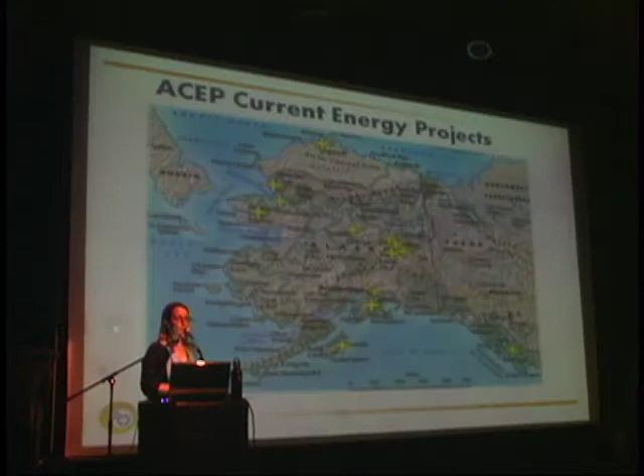So without further ado, I'm going to bring up Casey Pape, who's going to be our speaker. And Casey works with a group out of the Institute of Northern Engineering who's been doing studies on cold-loving bacteria, or psychrophiles. And I'm not going to go into that at all because he is the expert on that. But they've been doing some really exciting work with those bacteria and biodigesters that could really make a difference for that technology here in Alaska.

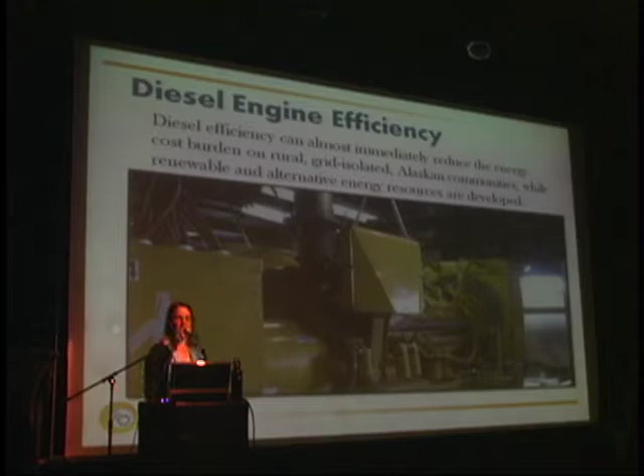So we look forward, Casey, to your presentation. Why don't you come on up? He just got back from Cordova where he's been doing a project there with the students. So he'll be talking about that as well. Casey, it's yours.

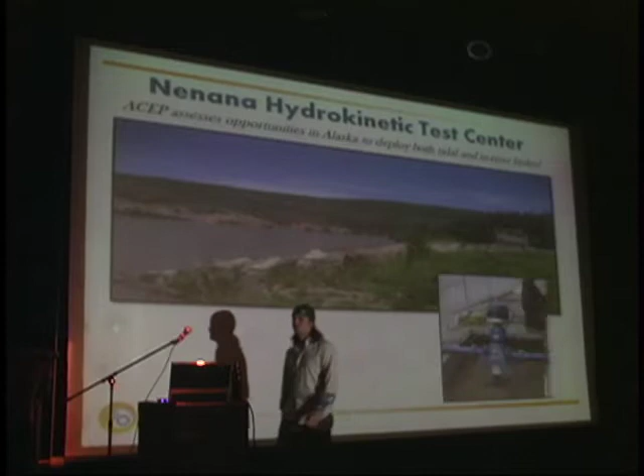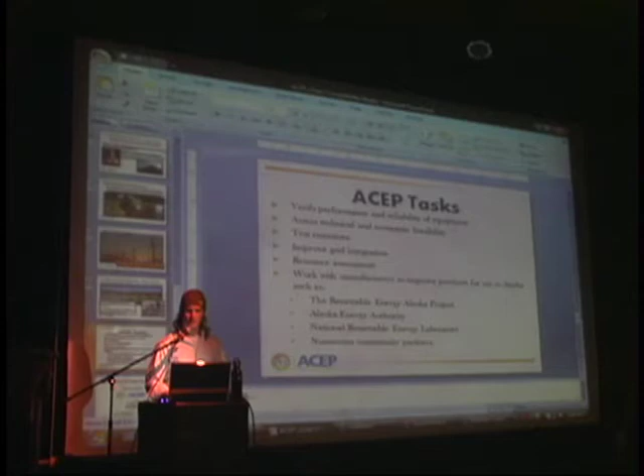Thank you again, Julie, for that nice, warm introduction, and thank you, everyone, for coming to our talk today. Let's see here. I'm going to put down ACEP's presentation and pull up mine.

So today, I am going to be talking about our Cordova Biogas project, which is located in Cordova, Alaska. And just a show of hands, is everyone here familiar with biogas technology or anaerobic digesters at all, or kind of have an awareness of what my talk is likely to be about today? Okay, so basically, this project was funded by the Denali Emerging Energy Technology Grant, and this project was titled the Cordova Biogas Project. And my lecture today will be Energy from Psychrophilic Bacteria, a cold region alternative for biogas.

Basically, my talk will go into discussing what our research group is trying to do, and that is anaerobic digestion technology is ubiquitous throughout the world. Anaerobic bacteria, which consume organic material as a form of respiration in the presence of a non-oxygenated environment, exist in all regions of the planet, but they're most successful in warmer regions. Their biologic rate is highly dependent upon temperature.

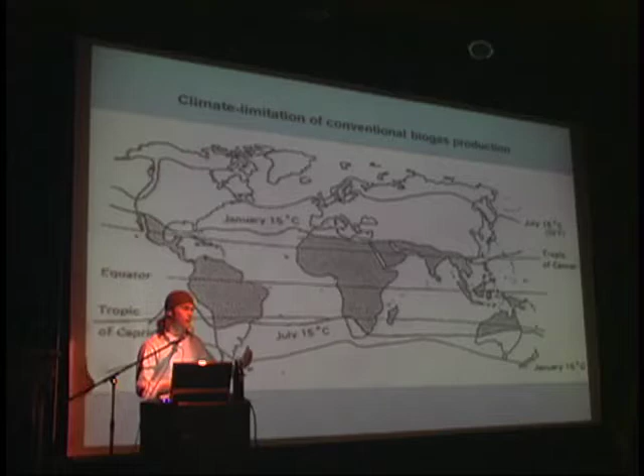So what our research group was trying to do was extend that technology further north in latitude, or southern in latitude. So that's what we're going to be discussing today. These digesters are very popular in equatorial regions of the world, but they're not very popular as you go further north and the temperature becomes a limiting factor.

So my talk summary will go into the motivating research and the goals of this project and some of the ideology behind it, as well as an introduction to small-scale anaerobic digestion technology. And then we'll go into the Cordova Biogas Project and discuss what we learned, some of the triumphs and the pitfalls of that experiment, and then we'll discuss limitations of the technology and some of the future prospects for the technology in Alaska.

I would imagine my lecture will go for about 30 to 45 minutes, and then just open it up for a Q&A discussion. And really welcome all feedback, all back and forth. Would be really great to hear what you guys all have to say, and any questions that you have about the technology, I'm more than willing to entertain, as well as my research in limnology and thermokarst lakes for some of you that were expecting a talk that was more along those lines.

So the project goals and the summary of the project was to improve conventional anaerobic digestion efficiency through the use of psychrophilic, cold-adapted bacteria found in Arctic lake sediments in Alaska to provide cooking and heating fuel for Alaskan households, again, at the small scale.

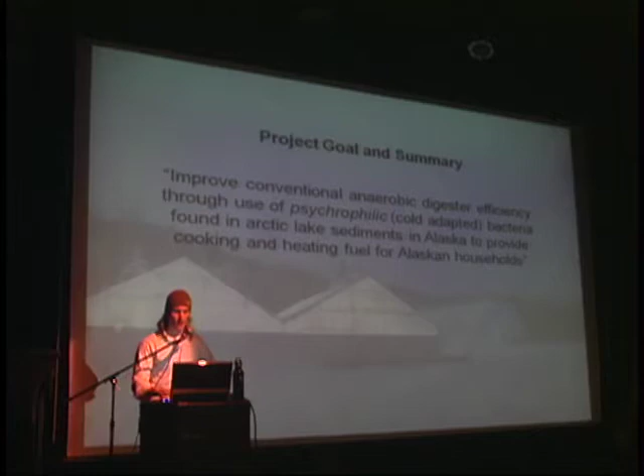So really we're entering into an age where we can no longer look at materials and products in this kind of linear fashion of a product is made and then thrown away and that's it. We now need to start looking at these things as, even though they have no more use to us, they're still a resource, and we can extract the energy that's still retained in them, or resources that are still available to us.

And so organic food waste, human waste, animal waste, these are all resources that we're now starting to reevaluate and realize that, you know, we have to recycle them or dispose of them at great cost to us, but there's actually a resource potential there. So the goal of this research is to try and utilize that for something that we all care about.

And in Alaska, an obvious one that comes to mind is energy, because we all know the high costs of energy, electricity, gas, heat, everything is more costly up here due to the nature of how spread out everything is and how much it takes to transport.

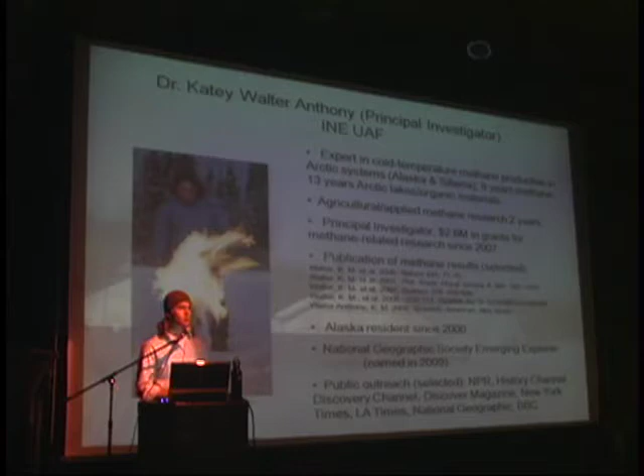And basically, they became emerging explorers in 2009, and during a meeting, they got to discussing their disciplines. And Katey, my professor, who primarily studies permafrost and thermokarst topographies, focuses her efforts on studying methane emissions from Arctic lake sediments around the Arctic in both Alaska and Siberia primarily.

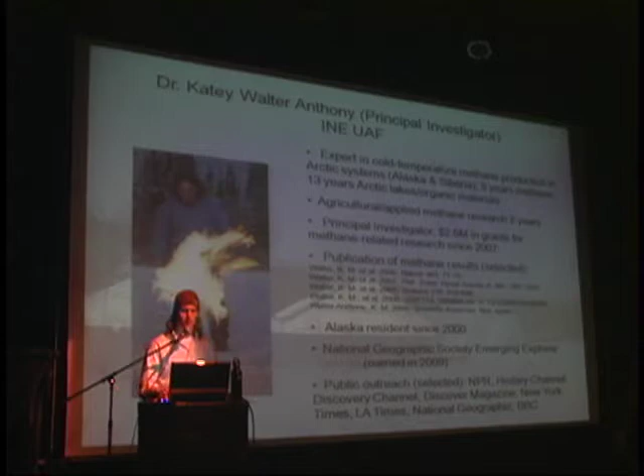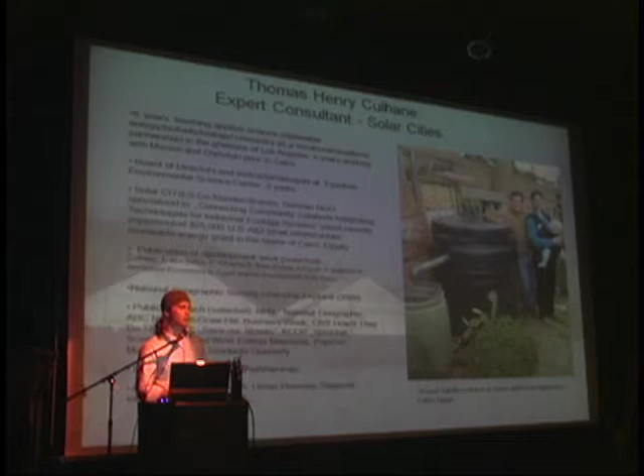And T.H. Culhane develops small-scale anaerobic digesters in places like Egypt, Pakistan, Nepal, places like that, where the cost of energy is very high and often poor education, poor infrastructure. Biogas technology is coming on very strongly in these regions because it offers great personal benefit and quality of life for very minimal cost.

So here's our target molecule. Our target molecule is methane. For those of you who don't know what biogas is, it's a mixture of multiple gases, methane being the primary one, the target one, the one that we're interested in, as well as carbon dioxide and trace other gases, water vapor, hydrogen sulfide gas, and a slew of others, or volatile fatty acids, things like that, but in trace amounts. For the most part, it's methane and carbon dioxide.

And this can be burned directly when gathered into a high enough energy density or high enough density, it will ignite. And it can be used for cooking stoves, heaters, lights, anything that methane can be used for, anything that natural gas can be used for, biogas can pretty much be used for as well.

So technology overview: anaerobic digestion, which is the overall process for making biogas, is a multi-step process in which bacteria obtain their energy by consuming organic matter without the presence of oxygen. So whereas you and I breathe air through an aerobic pathway, we release CO2 and water vapor in order to consume sugars and our carbon to make ATP. These bacteria do it in a non-oxygenated environment.

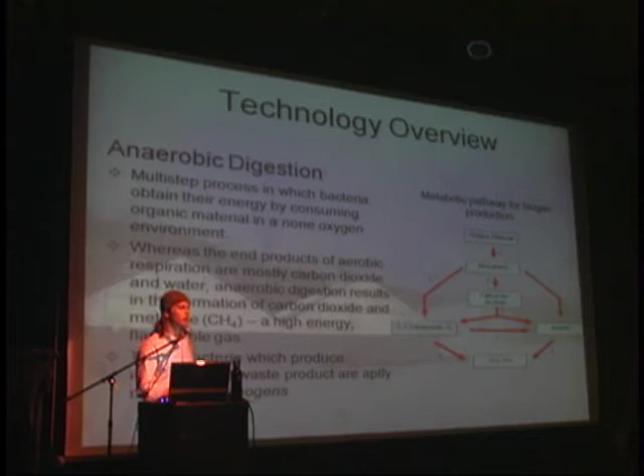And that requires more than just a single microorganism. It requires a slew of bacteria ultimately. And so the pathway is 3, arguably 4 steps. So you have a hydrolysis phase where complex organic matter is broken down into simple sugars, and then from there is fermented, in which acetogenesis occurs, making acetic acid, and then from there it's ultimately consumed by methanogenic bacteria, which release methane as a byproduct of their respiration.

So these are methanogens, and methanogens are defined by the temperature range they occupy. So there's three main classes of methanogens: thermophilic, mesophilic, and psychrophilic. And what this project focuses on is the psychrophilic. Thermophilic and psychrophilic are both labeled extremophiles in that they live in environments typically assumed to be non-ideal for life, extreme climates. And that's all I'm going to say about that.

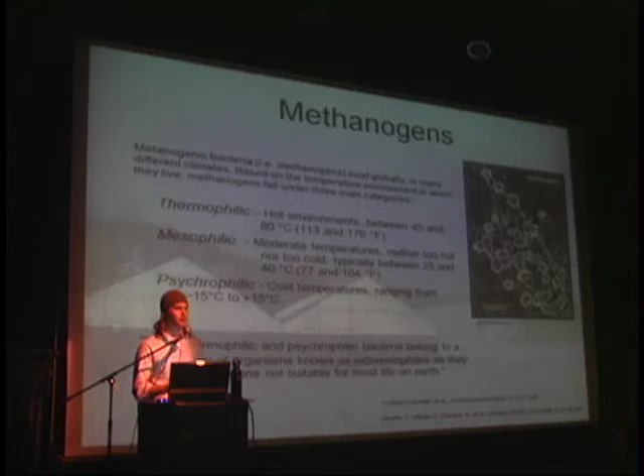I've got a little picture here of methanogens, a type of methanogenic bacteria. This is a colony type bacteria, but I want you to know that they exist in all different forms, single-celled organisms, flagellated, mycelium, all sorts of stuff. So they don't all look just like that.

So basically, what we're trying to mimic in this experiment is like a cow's stomach or your digestive tract, a non-oxygenated environment where bacteria can break down organic material and be cultivated in a typically warm place in order to utilize organic material and release methane. Since our goal is the methane, we want to try and optimize the conditions in which those bacteria live.

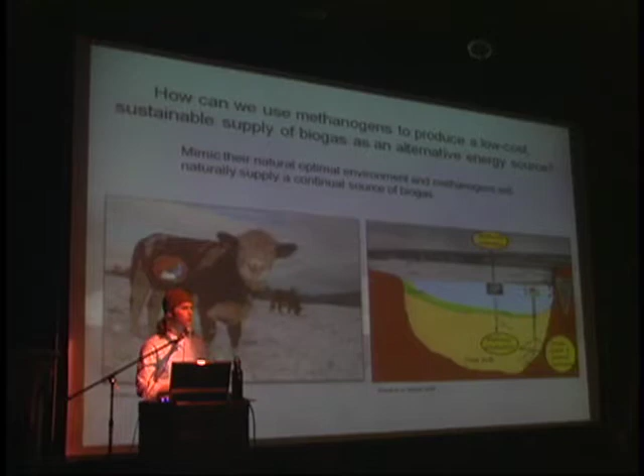And the guiding research, what my lab group mainly focuses on, is these thermokarst lake depressions in and around the Arctic. And these same bacteria that can be found in cows' stomachs and your and my digestive tracts are also found in benthic lake bottom regions in the Arctic. There they are experiencing much colder temperatures than you or I exist at, and certainly than what our internal bodies provide for these bacteria via homeostasis.

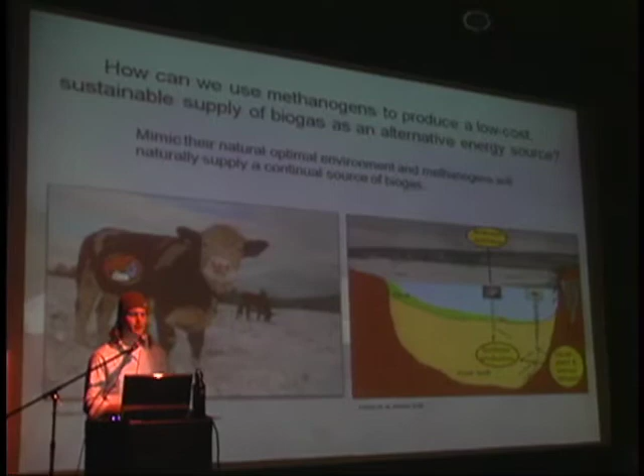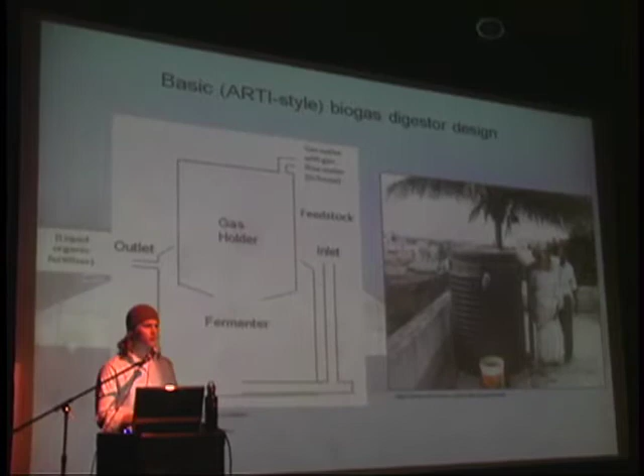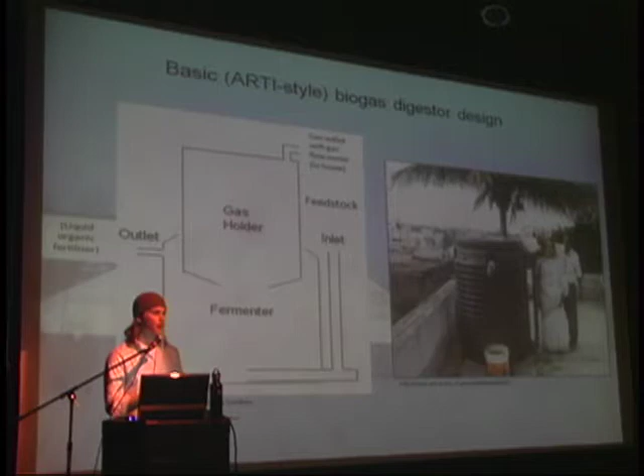So yes, if you have any other questions about that research, feel free to ask as well when it comes to the Q&A. So the basic design of an anaerobic digester, which is what we built in this experiment, is very simple. Since we're ultimately mimicking a stomach or a rumen, there's really not too much that you require in that. You just need to have a non-oxygenated environment, so no exposure to air. You need a warm and wet place, and you need to be able to collect the gas that comes off of that. So this is a very simplified model.

This is the basic ARTI style. ARTI is an appropriate rural technology institute based out of Pune, and they specialize in making rural adapted digesters. They can be kitted up, they can be shipped out, they're appropriate for regions where you have limited access to materials, and they're very minimalistic.

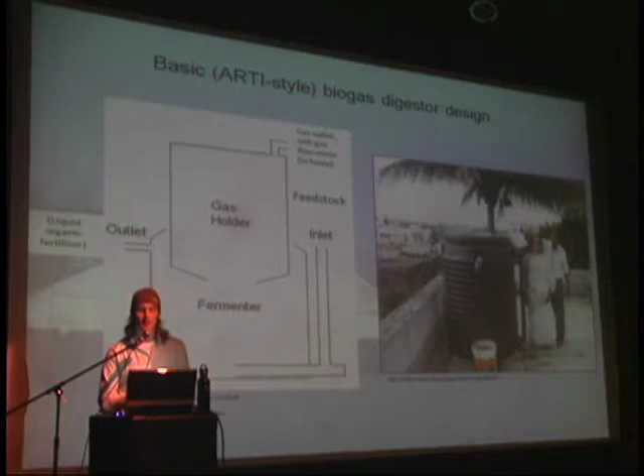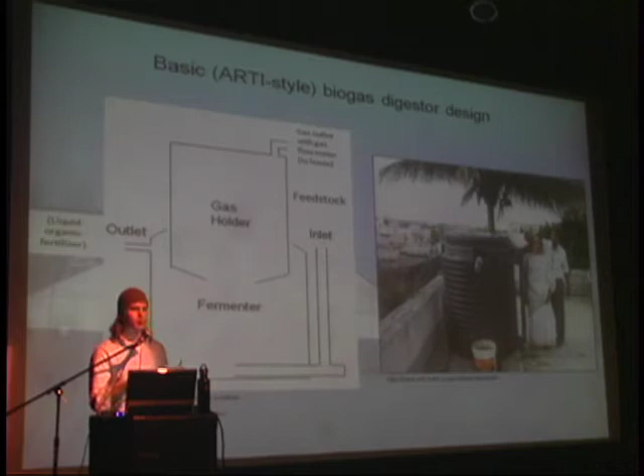At the industrial scale, there's really not a whole lot of difference between small scale and large scale. It's just there's more mechanized inputs of mixers, of heat exchangers, all designed just to kind of optimize the reaction that's going on inside the vessel. But basically, you're just trying to keep a wet space in order to harbor bacteria and a carbon source.

And the point of this slide is to emphasize that there's multiple ways to get to grandma's house. There's no one style that's patented; this technology is absolutely accessible to anyone. With just a few components, with a few tools, anybody can make one of these. But there are some things that need to be considered before attempting it on your own.

So this brings us into the Cordova Biogas project. The Cordova Biogas project is located at Cordova High School, or directly adjacent to Cordova High School. And it's a cooperative research effort between the University of Alaska Fairbanks, Cordova School District, and Cordova Electric Cooperative, CEC.

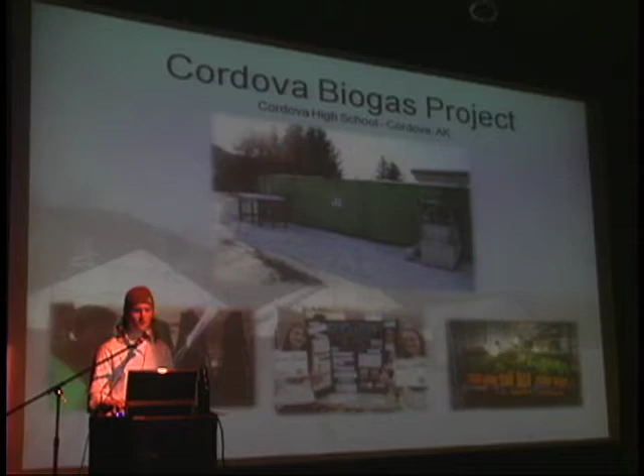And so the project is two-phased. In the first phase, we are doing more of the science, just trying to find out what are the optimal conditions in which we can provide these bacteria at colder temperatures, and what can we expect as far as a yield from that. And then the second phase is to try and utilize and demonstrate that technology to Alaskans in order for them to get their head around the technology and see how it might apply to an individual's life or just utility.

So in the first phase, we built and deployed six 1,000-liter digesters, which were recycled sorbitol, sorry, sucralose containers that were used for canneries and fish processing facilities in Cordova. And then within that, we inoculated each tank with a different slew of bacteria. The bacteria cultures were either obtained from farms in Delta Junction, which was essentially collecting a bunch of cow manure and putting it into the tanks and then putting in food waste, or we took lake mud samples from Goldstream Lake in Goldstream Valley in Fairbanks.

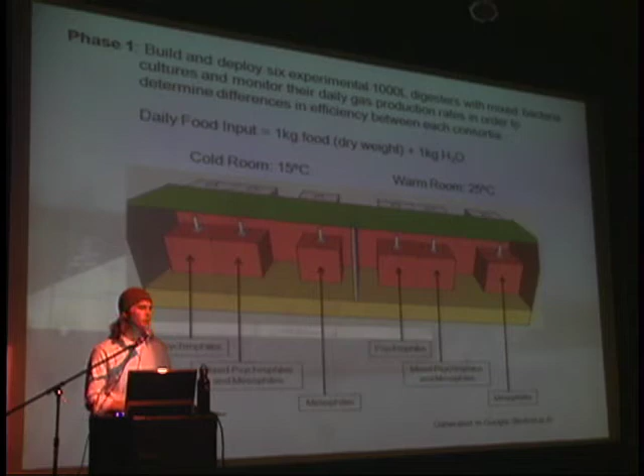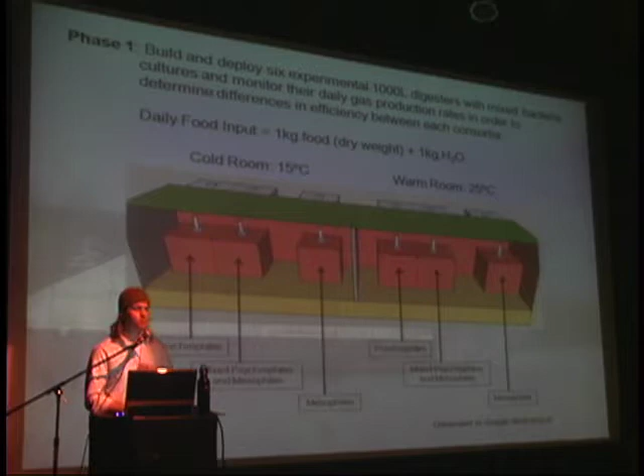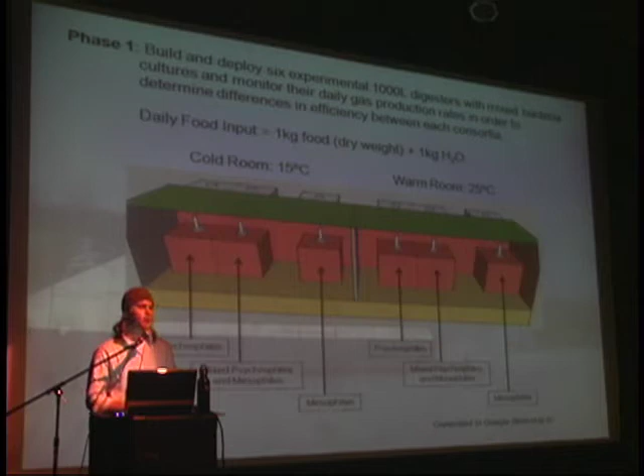We separated the tanks into two separate rooms and isolated them temperature-wise. One room was labeled cold room, which isn't really cold, but 15 degrees C, and another room which was 25 degrees C. And conventional digesters shut off around 25 to 30 degrees C. 30 degrees C is kind of the minimum that is required for small-scale digesters to really work well and effectively for an individual household or otherwise. And so we wanted to test temperatures that were slightly less or non-ideal in order to see whether or not we had anything going with these psychrophilic bacteria.

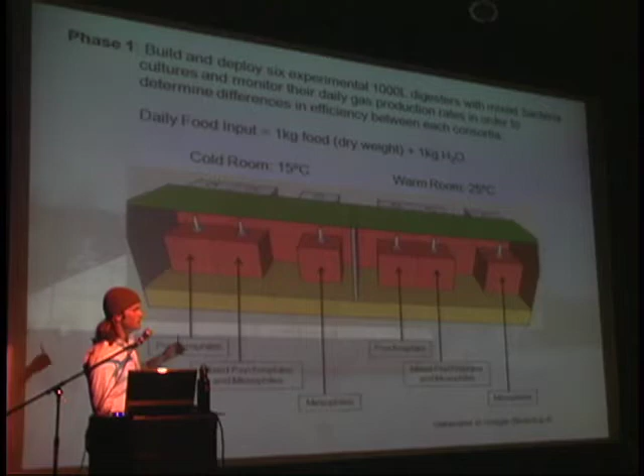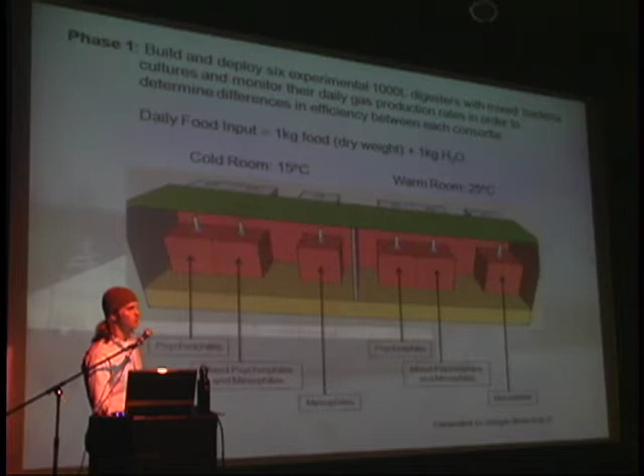So as you can see, tanks number 1, 2, 3, 4, 5, and 6. Tanks number 1 and 4 were psychrophilic cultures only. Tanks 2 and 5 were a mixture of psychrophilic lake mud and cow manure cultures. And then tanks 3 and 6 were strictly mesophilic. So the idea here being we would see a distinct difference between tanks number 1 and 3, tanks number 4 and 6, and then possibly some sort of displacement of one population over the other in tanks 2 and 5.

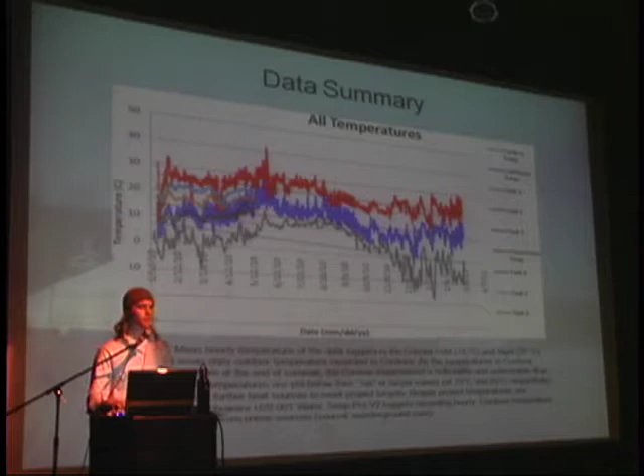So a summary of the data, and I'll just go through this and we can talk more about it during your questions, but we monitored temperature, we monitored ORP, we monitored pH, we monitored dissolved oxygen, but ultimately we monitored biogas production. That's what we all cared about.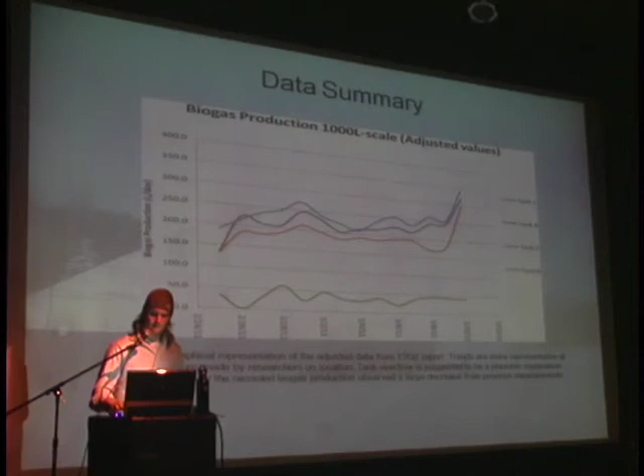So anyway, this is a fairly useful graph where you can see that there's a clear distinction between warm room and cold room. At 25 degrees C, the bacteria did much better than they did at colder temperatures. And in fact, only one bacteria culture was observed to be producing any gas at all beyond nominal amounts in a 15-degree environment.

So the response curve for temperature versus biogas production for anaerobic digestion is kind of a hockey stick or exponential growth model. It falls off very sharply about 20 degrees C and is almost nominal below 15 degrees C. And we've essentially demonstrated that that is in fact true. But we did observe that psychrophilic cultures were more efficient than mesophilic cultures in any one example. So ultimately that is pretty encouraging.

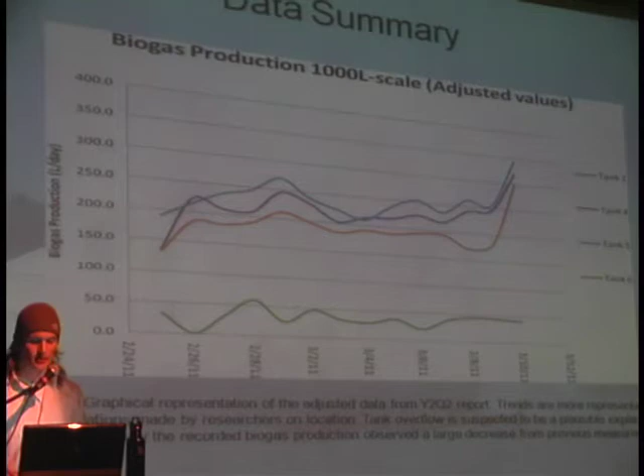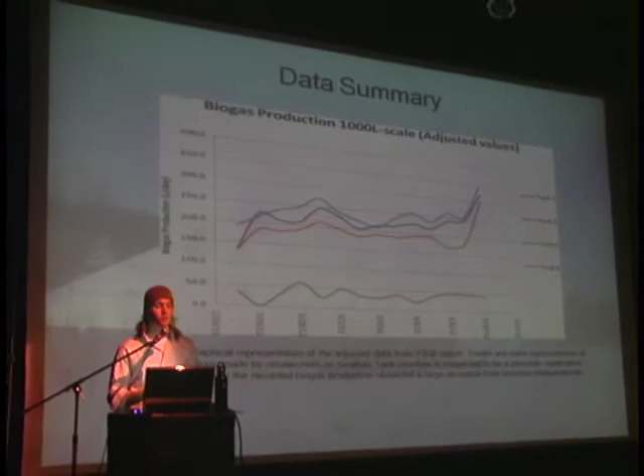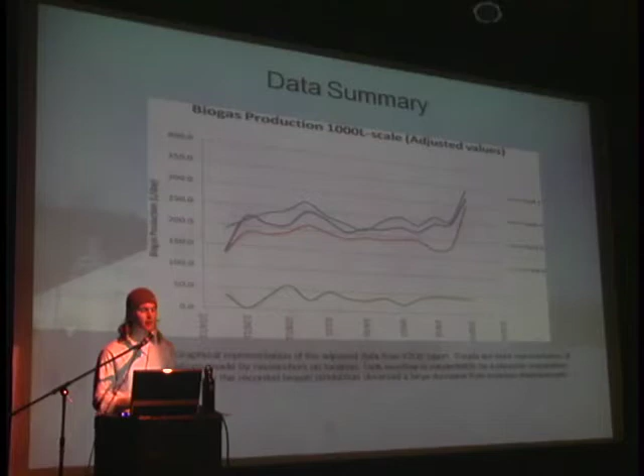But for similar scale and size reactors of this type, at 30 degrees C in India and China they could be expected to produce as much as 1,000 liters per day, which is enough to provide a single family residence with heating or cooking fuel at least. And here, our greatest efficiency was less than a third of that.

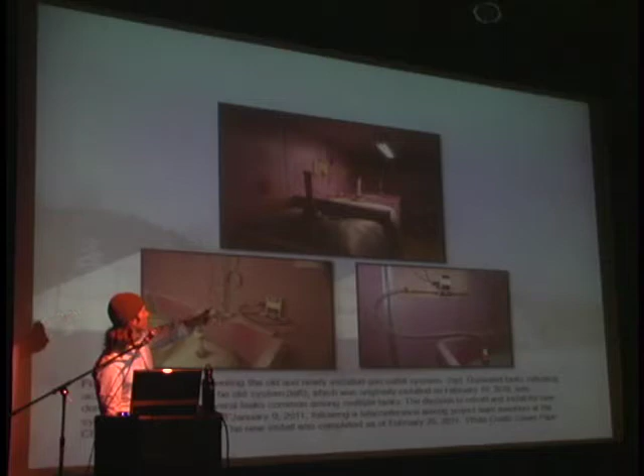So anyway, these are the digesters that we have. We located them in a 40-foot connex and insulated both rooms. And then you can see in this picture here that there's a positive pressure on each of the tanks that are producing. I guess that is the point of that slide.

We did observe a very noticeable acidification among all of the digesters once we sealed them off and first inoculated the bacteria and started feeding. That was attributed to overfeeding in the initial part. It's well documented in the literature that acetogenic bacteria, which occur before the methanogenic pathway, can essentially outpace methanogenic activity. So for anyone interested in starting up a personal digester, it's really important that you're trying to pair those up as closely as possible and get them to work symbiotically and in line with each other.

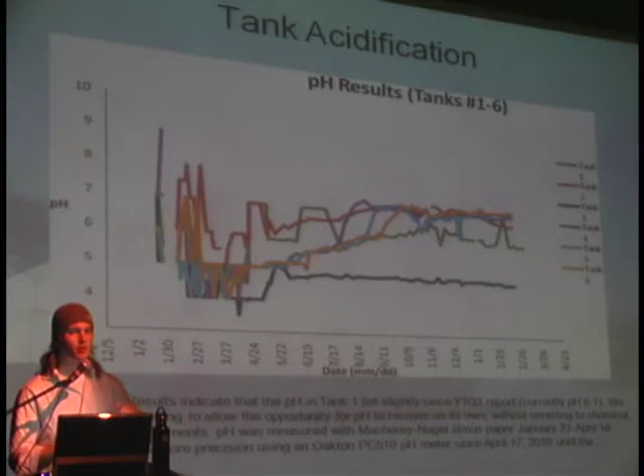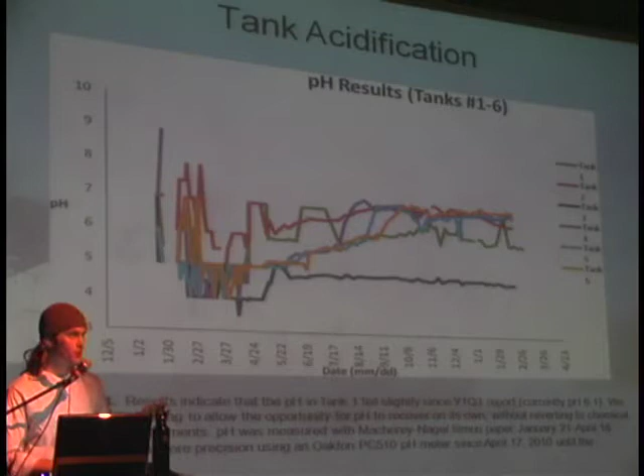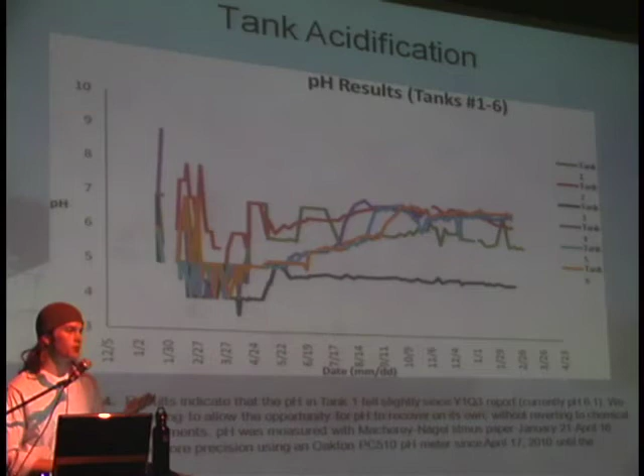Because once you have kind of a runaway acetogenic effect, the pH goes down, and methanogenic bacteria are very sensitive to pH. So they will effectively shut down and stop producing methane. So what we did essentially is we shut them down about mid-March of last year and waited for them to rebound. And in some cases, we had to treat them with lime and with sodium hydroxide in order to get their pHs back up before they could start producing methane again.

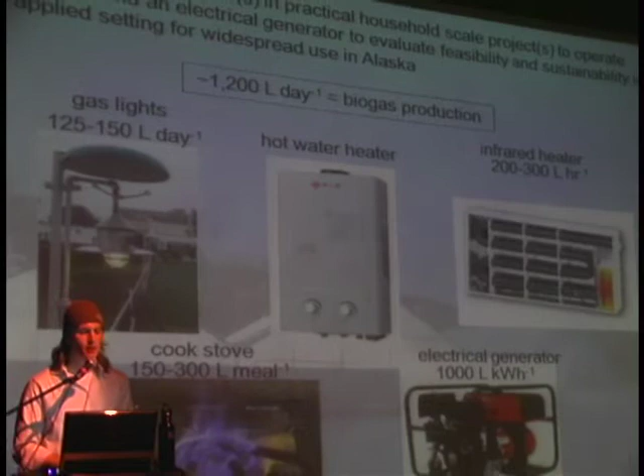And so this will take us into phase 2 of the project, which was to try and demonstrate practical uses of this technology at the household scale in Alaska. And so we had a bunch of different ideas about how to do this. There's all sorts of devices that you can run off of biogas. Like I said, it works pretty much just in place of natural gas or propane.

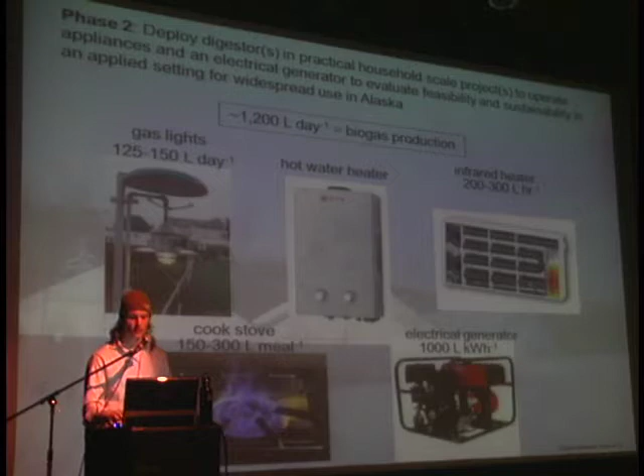But it's important to think about it: you're ultimately energy limited because you have only about 1,200 liters a day to deal with, or in this case, about 350. So what can you really do in a practical manner?

So this brings us into the student involvement, which I, from my own personal experience, thought was one of the greatest benefits that we learned from this project, and that was pairing this university research with a high school institution was really a rewarding experience, not only for the grant, not only for the students, for myself, but for the whole process in general. This project really couldn't have taken off without student involvement.

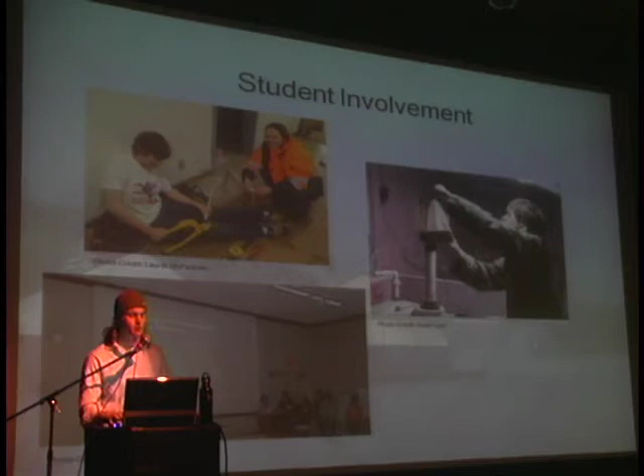They were involved with every step of the way. They helped with construction. They did daily monitoring, daily feeding of the project. They presented and really were outspoken in presenting and discussing the grant. Really kind of the rock stars of the first round of the Emerging Energy Technology Grant. So I was really impressed with their efforts here. They met with the state senate.

They had all sorts of really cool, innovative ideas to pair this technology with greenhouses, to test and find ways to purify biogas by, here's a picture, them bubbling it through lime water and measuring the CO2 content on either end. So just a really impressive bunch of students that I got to work with.

And it really goes to show that they were just really excited to be involved with something, because in rural communities, you know, they don't often get too many opportunities. So it was really kind of awesome to see the university take stock in them, their electric cooperative to take stock in them, and then see where they went with it, because they really ran away with it.

So a couple of quick demonstrations. We had to find a way to store the biogas, and we did so by sleeving it inside of this big 1,000-gallon tank, mimicking the ARTI style gas collectors. So it's kind of hard to see, but there's actually a tank inside of that tank, which is used to passively store and deliver the gas for powering devices.

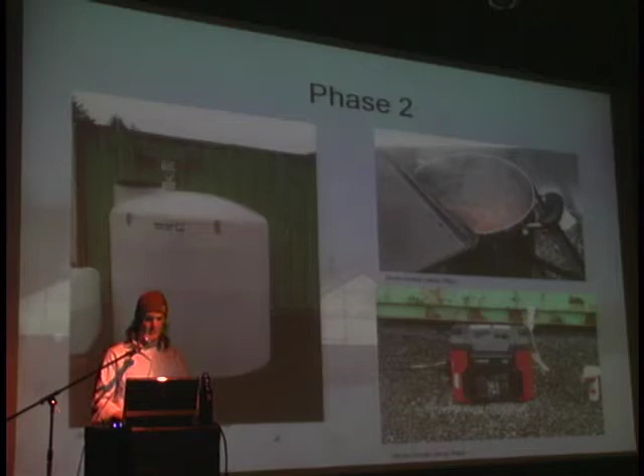And so here we have a pot of boiling water, just as a clear demonstration. And in the lower right-hand corner is a generator that we got to run for over an hour on about 300 gallons of gas. So just directly in line. And forgive me, I will try and show you some. But some of the students had some cool videos.

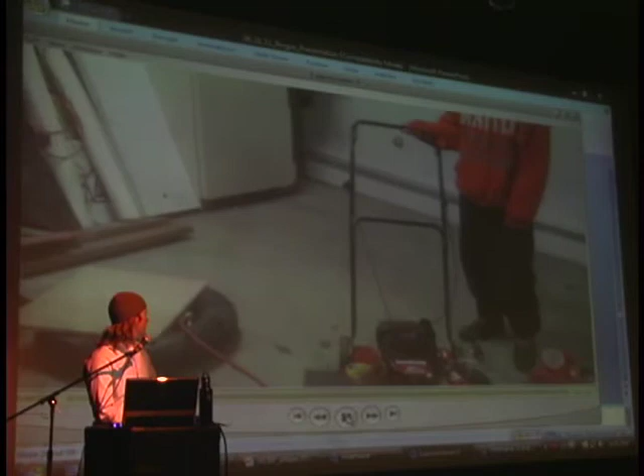I'm Ben Americus, and this is my colleague James Allen. And we have an inner tube full of methane that we collected from our biogas digester. And we got this little cord coming here, connected onto this other cable, and we electrotaped it shut. Then we got another cord right here that comes into the fuel intake. And that's shut closed, so hopefully it'll block all the gas from leaking. And I guess we're going to try to get this to run right now. Yeah. Holy dude! Holy dude! We're running on biogas! Woo-hoo!

So they were obviously excited about it. Sorry about the video here. And then I have another one. I'm not sure if it'll do the same thing on us, but this is running a generator on biogas, which was as simple as plugging it in. And I'll let the video show, and I'll explain it as it goes.

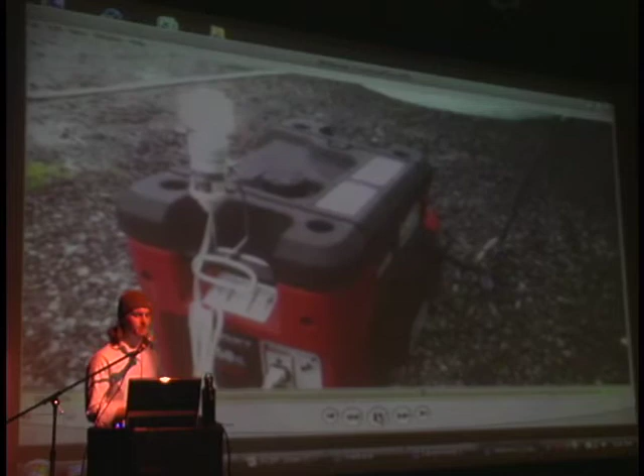So this is a Husky 1850 watt gasoline generator, 4-cycle, and all we did here was just plumb a line into the carburetor, and had it running at about half psi. It kicked over, so a little bit of starting fluid, and that's all it took to get it going. We're at really low pressure here, less than a psi. And like I said, this ran for just over an hour on about 300 gallons, so right around 1,000 liters of biogas.

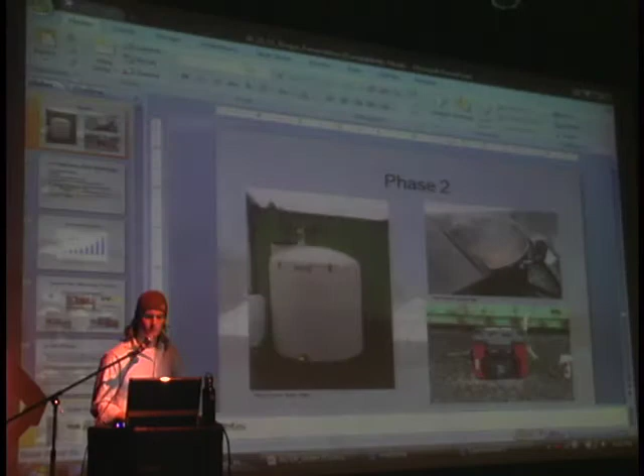Okay. Going back to the earlier graphs that you saw, there's some obvious limitations of the technology. For those of you thinking you have an interest in the technology, there are certainly some things to consider before adopting one of these. Otherwise, you probably just end up with a frustrated mess.

So the first one is that it's a very temperature limiting reaction. And we were unsuccessful in demonstrating sufficient biogas production at suppressed temperatures that you could be expecting to encounter outdoors in Alaska. So first and foremost, if you were interested in a small scale, you're going to have to figure out a way to heat this in order to get any sort of BTU output from a digester.

There is an odor concern with these, though we did notice that working with lake bacteria, it was very interesting. The tanks that were using psychrophiles smelled like a pond. Still not the most favorable smell, but not nearly as bad as something that you would expect from a manure-based digester. But anyway, it can be a very mechanized, hands-off process if you design it right, but that's something to consider. If you don't particularly enjoy the smell, you need to figure out a way to not handle the material in a very high exposure type setting.

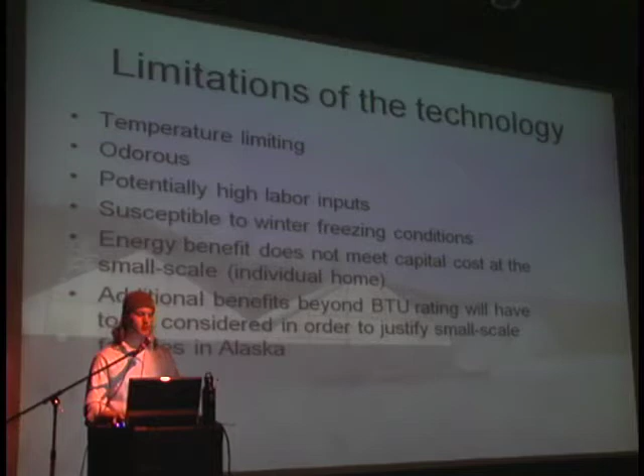So really, where these are starting to come on strong is in areas of high organic waste streams and pollution into the environment. So incidences of fecal coliform, if they're an issue, installing anaerobic digestion units in your dairy operations around your area can severely limit that or reduce the amount of incidences there are with that, because you're focusing the waste, you're treating it locally, and you're reducing the nutrient and bacterial release into the environment.

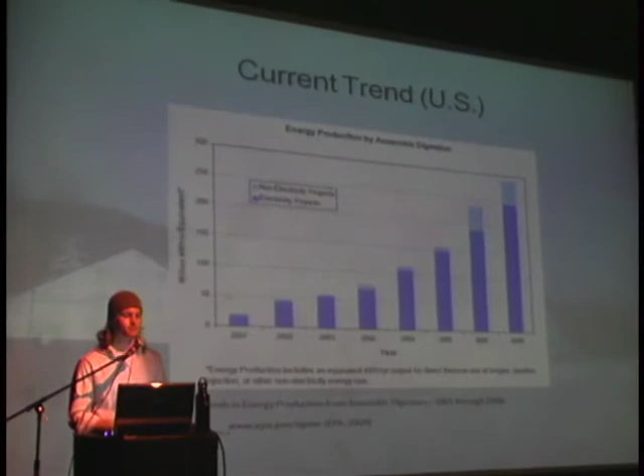So the current trends in Europe and the rest of the world, these are being adapted with increasing pace and scale and immensity of the operations. In the United States alone, there's now over 300 recognized biogas plants. Mostly they are located on dairy farms, because there's an obvious train of thought there. You have a really mechanized, concentrated location where you can process the animal waste and focus your efforts, whereas being really spread out kind of makes that more difficult.

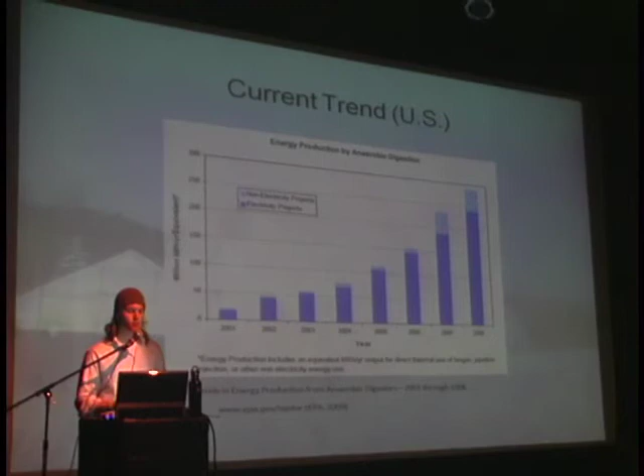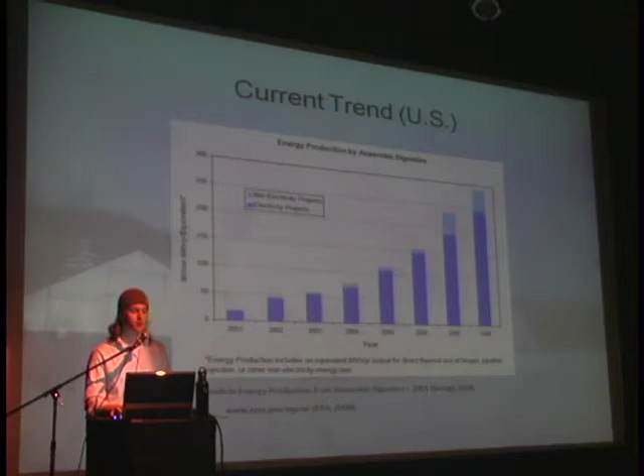But nonetheless, it's becoming very apparent that we need to start looking at these waste streams as more of a resource and figure out a smarter way to deal with it than just release it into the environment. So the future of the technology for Alaska is likely to be more adopted into the large scale. For example, capped landfills is a good example. There you have a product called sour gas, which is more or less the same. It's slightly different because it has higher sulfide content and hydrogen sulfide.

But here in Fairbanks, we have one capped landfill with 13 plugged wells. They're not doing anything, but this summer they're likely to start research on feasibility of tapping those wells. And in Anchorage this year, they're going to be doing the same. They've got an active flare, and they're going to be installing all the wellheads, or the equipment to harvest the gas from those areas.

And then here we have biogas in Kristianstad, Sweden, which is a similar cold environment, certainly not warm by any means, and they have highly mechanized, industrial scale processing facilities all throughout Sweden. And they've got some really cool projects where they integrate the technology into all facets of life. So they take in slaughter waste, they take in all organic waste from individual residences and households, and they process it and produce hot water, which they can use to regulate the digester itself and increase its efficiency.

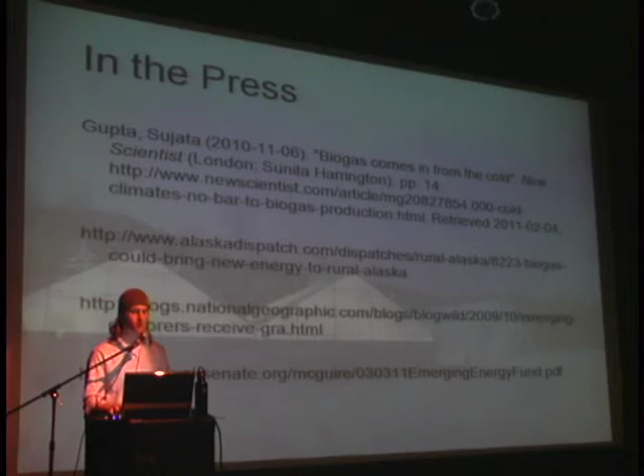So our project has been really successful, and I give a lot of the credit there to the students' involvement. We've been featured in quite a few different press releases and noticed in the media, so we've gotten quite a bit of coverage, and that's been awesome.

And we are actually going to be producing a flyer through ACEP here soon, and it's in its final... This year? Oh, it's here. Okay, so it's in the back. Anyway, really excited about that. That's a great little handout for those of you just interested in a summary of the technology.

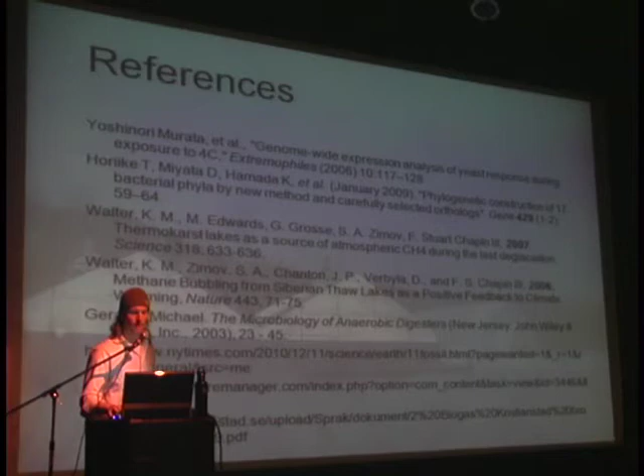The upper limit? Well, it really depends on the type of bacteria that you're catering to. For mesophilic reactors, it's typically about 35 degrees C to 50 degrees C. And then for thermophilic reactors, which are the most efficient, you know, kind of makes sense, highest temperature, most efficient, those operate in a range of around 56 to, I believe, about 60 degrees centigrade. And then there, it falls off again.

Oh, these? Psychrophiles go up to about 25 degrees temperature, and then they just probably are replaced by mesophilic cultures. But the end goal here, or the end message, is the warmer the better. They all do better at warmer temperatures.

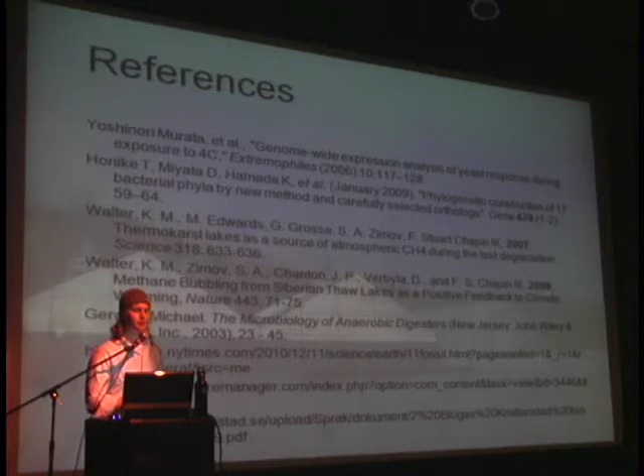Oh, before you start killing them? It's usually, like I said, it depends on how fast you change the temperature. They're all pretty sensitive to temperature. So if the rate at which you change the temperature is more than about 5 degrees centigrade in an hour or so, you'd probably kill all the culture and have to start anew. So the upper limit, I've only seen it go up to about 25 degrees C, and it keeps going. So I don't really know what they're tolerant up to until they just die.

You also said it was freezing. I think that if they were done on lakes, you could actually freeze them and eventually thaw them out. What happens in the spring? Well, right, but even then, the sediments are kind of being protected, and for the most part, you're right. They hibernate for the most part.

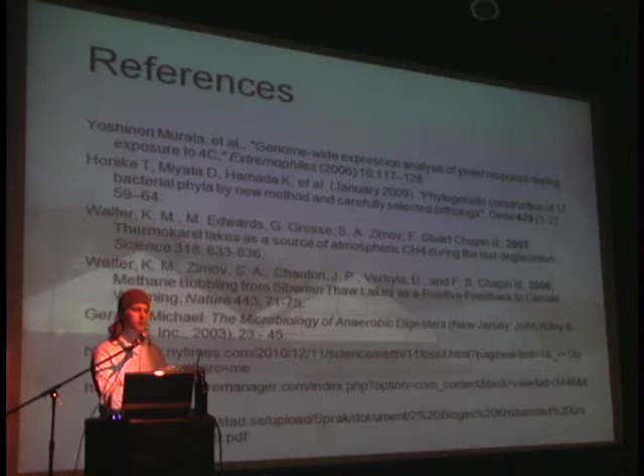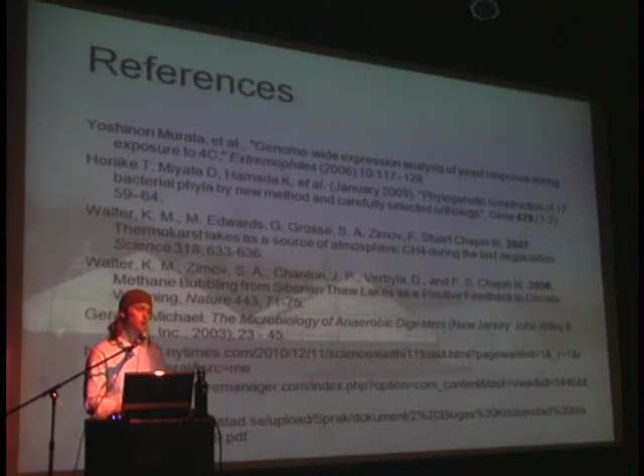But since we're only really investigating the end product, methane, that's not necessarily determining anything about whether or not there's still live bacteria there. It's just that in the process, they typically hibernate and they won't produce any more biogas, or any more methane. And if that's your only way of really seeing if there's any biologic activity there, then for our purposes, that's it. Oh yeah, absolutely, and again, it only takes a small culture to ultimately become a large culture.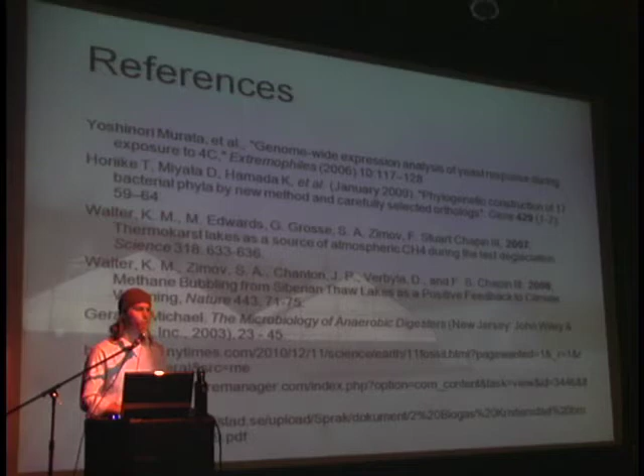Yeah. There's a lot of waste heat. Yes. And have you thought about capturing waste heat? Let's say someplace is burning diesel fuel. Mm-hmm. And the exhaust is just going out into the atmosphere. Yes. And it's pretty warm. Before you use that to heat your digester. That's a perfectly good example of how this technology can succeed in Alaska.

If you pair it with other waste streams, or if you're able to find a waste heat source, then it's got other additional benefits that could really justify it. But if you're just looking at it from the traditional linear sense of how many BTUs does this have, from that lens, it's hard to justify the technology just as a standalone technology. But if you combine it with other things, then it makes a lot of sense.

And so, like I touched on about the Kristianstad, Sweden example, they pair biomass burning with biogas generation. They like the biogas for its clean burning fuel source, so they can use that in public transportation. And so they'll burn a lot of biomass and use hot water from that to heat their reactors, and then they get a really pure, high quality fuel that they can use in other areas where you don't want to use biomass, or that doesn't really make any sense.

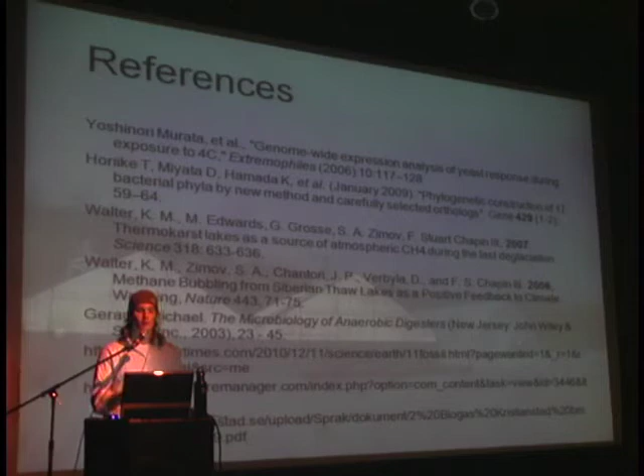So you're absolutely right. In Cordova, we had it adjacent to the building, but you could easily see in a high school setting, where this is kind of science in action, a cafeteria could be recycling their food waste and processing it in the boiler room where it's quite warm, and use the gas as fuel for the Bunsen burners on their lab benchtop or something like that. It would help students connect the dots as far as where their energy is coming from and what it is, and there's all sorts of other ways of looking at this. But that's a very good point.

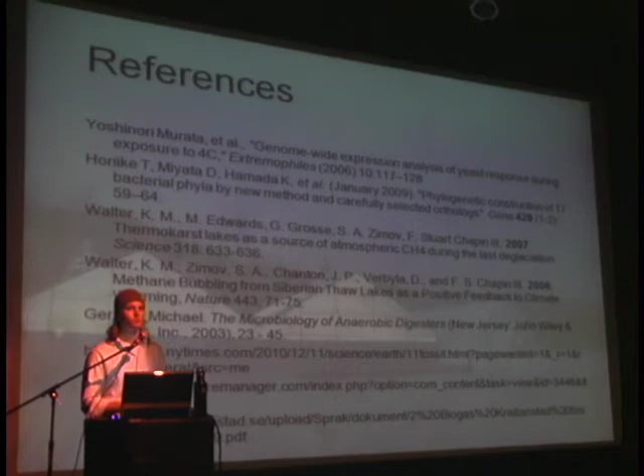Did I hear you right that the cold temperature bacteria were more efficient? Casey, can you repeat the question? Oh yeah, I'm sorry. The question was, were the cold weather bacteria more efficient? And certainly at the colder temperatures it would appear so.

Around 15 degrees C, only psychrophiles were the ones observed producing methane, and even at 25 degrees C, which is still not ideal for mesophilic, which typically is around 30 degrees C, the psychrophiles did do better. But even then, it started getting pretty close around that. There's a question in the back.

The cold temperature psychrophiles that produce the methane in these thermokarst lakes, are they operating at, I presume, barely above 0 degrees Celsius? Correct. They're able to generate a fair amount of methane. Yes.

The question is, in thermokarst lakes, in Arctic lakes in the wintertime, the water temperature, even towards the lake bottom and the sediments, is right above freezing. It's very cold. And here we still see large deposits of methane that can be found at the bottom of the ice or still suspended in sediments.

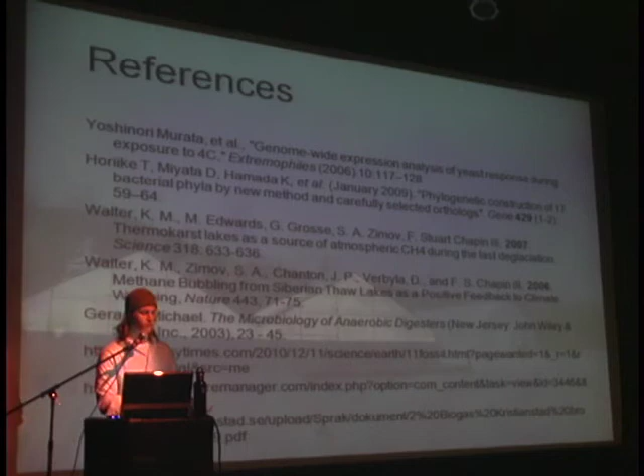I'm wondering how you use these findings of this bacteria working in cold conditions to improve the efficiency of a compost pile. The main object is not getting methane, but it is keeping this heap of compost. Right. Is there anything that can be done to improve the condition of that compost pile to encourage this cold bacteria?

Well, you raise an interesting point there, because essentially in a compost pile, you're talking about an aerobic decomposition of material. You and I breathe oxygen and we're very successful. It's a much more energy efficient way of decomposing organic material. If you notice, your compost pile is typically very warm in the center. It gets a lot hotter than you would ever expect. It's a much more exothermic process than anaerobic digestion, which is what we're talking about here.

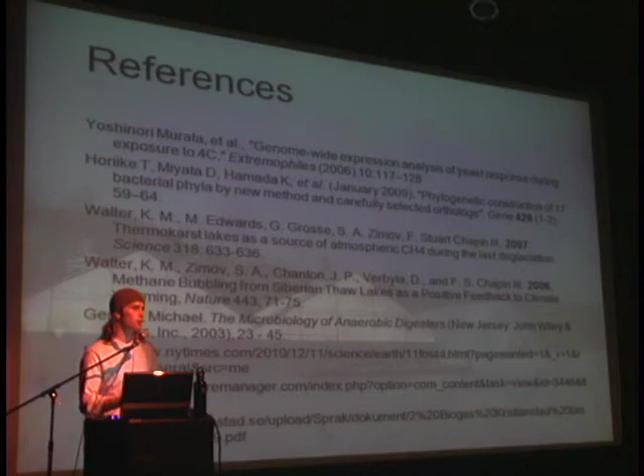So you could potentially use compost piles in order to insulate and heat a biogas digester and increase its efficiency through that pathway. Using it in the reverse, I don't really know how you'd do that. But my background slide here was Chena Hot Springs, expressing that there are places where there's excess thermal, which could be used to help process waste.

And there, Bernie Karl has said blatantly that he's just burning a tank of propane in his greenhouse to increase CO2 fertilization for his plants. Here is an example: you could burn the methane you're generating in a biogas plant or an anaerobic digester to increase CO2 fertilization, reduce methane release to the atmosphere, all sorts of things. Pick your favorite. Does that answer your question? As best as I can, I guess.

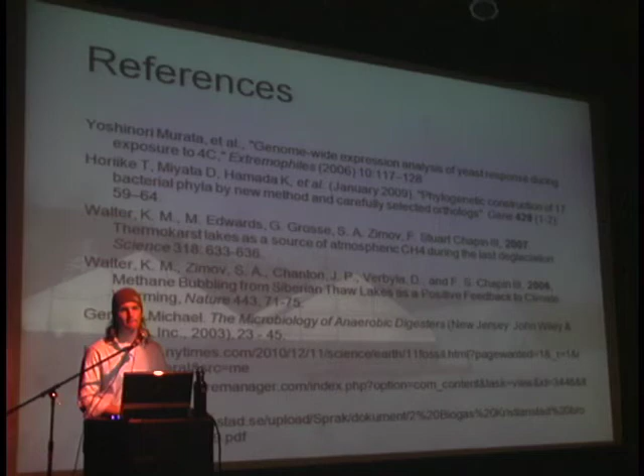Can you discuss a little bit what the students in the Cordova experiment used for their cultures, for their psychrophiles and their mesophiles? Sources of the cultures? Yes. Basically, we took our cultures from two places in Alaska. The first was from a lake in Fairbanks, so we cored lake sediments in Goldstream, and I believe Goldstream was the only lake that we took from.

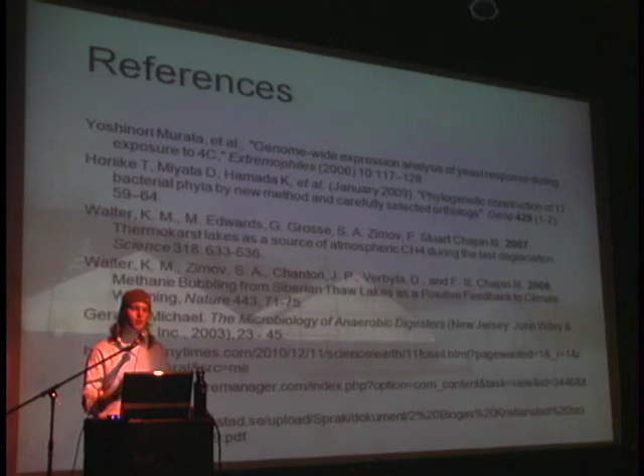That was just straight lake mud, and we threw it in these tanks and started adding food and water, and methane started being generated. The other mesophilic cultures were obtained from cow manure from dairy farms in Delta Junction. So those were naturally present in the digestive tract? Yes, in cows, in you and I, in everyone. Typically in China and India, that's what's used to inoculate their tanks, just manure.

And yeah, I guess manure is the best source I can think of. So it looked like tank number 5 was the most productive. That was a combination of psychrophiles and mesophiles, is that correct? Yes, and there, it's kind of interesting.

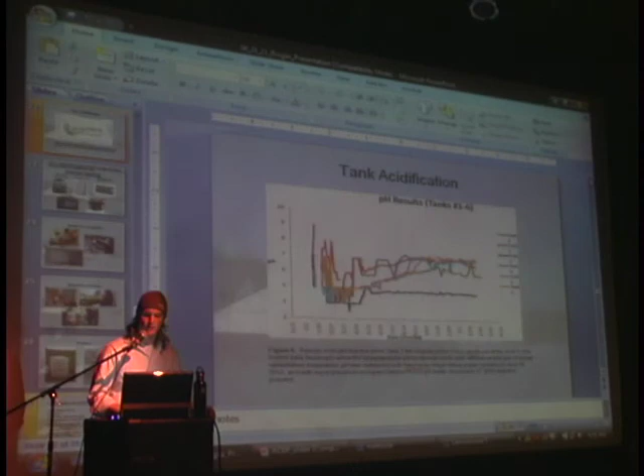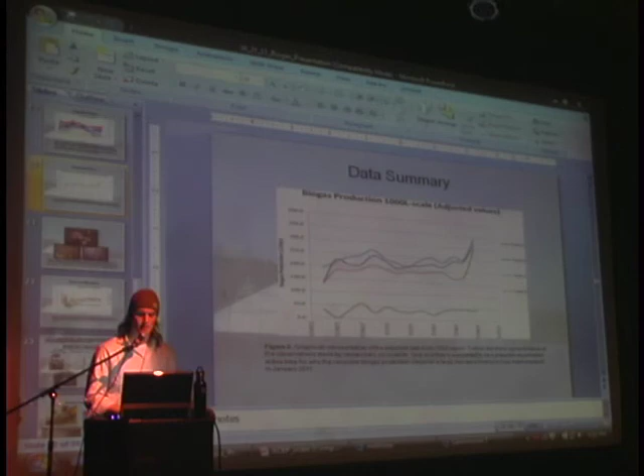It's hard to really make too many assumptions about, can you see, about what's happening here, because it's a mixed culture, and we don't really know whether or not one is outcompeting the other, or if they're both just doing well at that temperature, or what exactly it is.

So what we found here is that indeed, yes, 5 was the most productive, but we also had some issues with sampling and kind of overflow of material. Sometimes our vessels would get overpressurized and overflow, and so you could lose some material. But for the most part, that's all within a range of, it's pretty much the same. Though I don't want to say that definitively, because we just don't know.

It looks like tank number 4 was very close. Mm-hmm. And that was composed entirely of psychrophiles. Entirely of lake mud, yes.

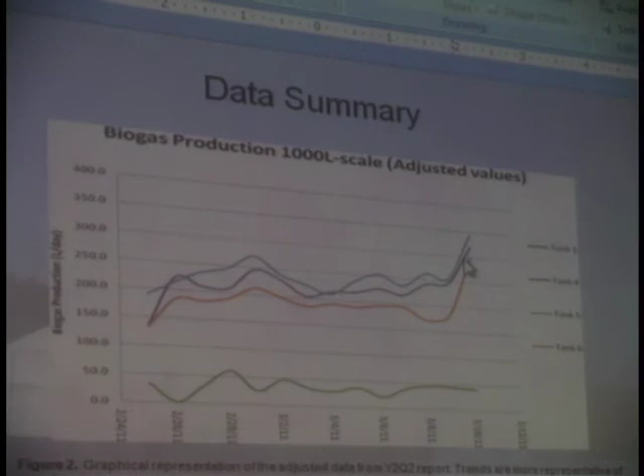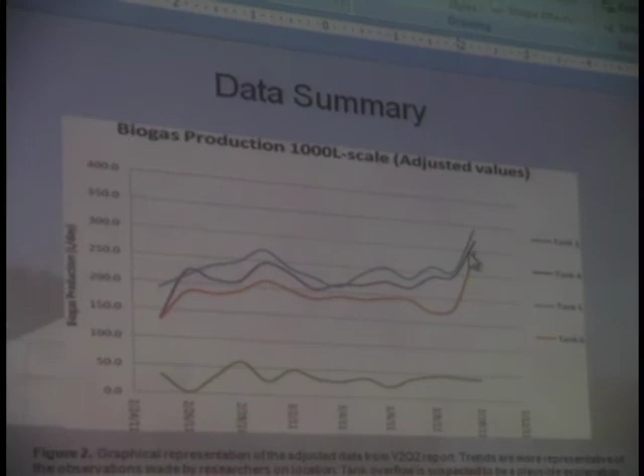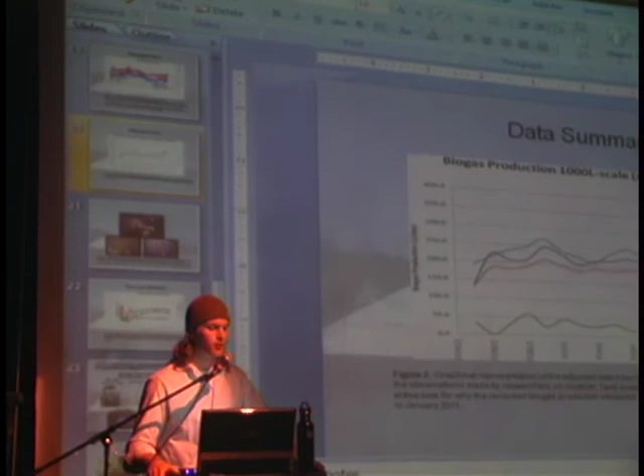Casey, can you speak to the timeline as far as from inoculation to methane production? Yes, I can. So these tanks were sealed as of January 19th, 2010, and they started producing flammable amounts of methane 2 days later on, I believe, January 21st. And after that, they kept producing.

We didn't have the same instrumentation in place for measuring, so unfortunately our data set is in some places absent or just not as well understood. But what we started finding pretty shortly after that, within 2 to 3 weeks after that, was a very noticeable decline in pH.

And so what that was attributed to is we had students who were feeding on a daily basis 1 kilogram of food and 1 kilogram of water into tanks that really didn't have that much biological activity in them yet. They didn't have that much of bacteria cultures inside. And so what essentially started happening is acetogenic bacteria, yeast, things like that, started fermenting the material more and causing a decrease in pH. And that has been documented throughout the literature to substantially hinder biogas production, or at least methane production.

So your first indication when you start to see a decrease in pH is to stop feeding. And so we stopped feeding for about 3 or 4 months until June of that year, at which time the pH was increased back to around neutral pH. So anywhere from about 6.5 to 7.5 is an ideal range for methanogenesis and biogas production.